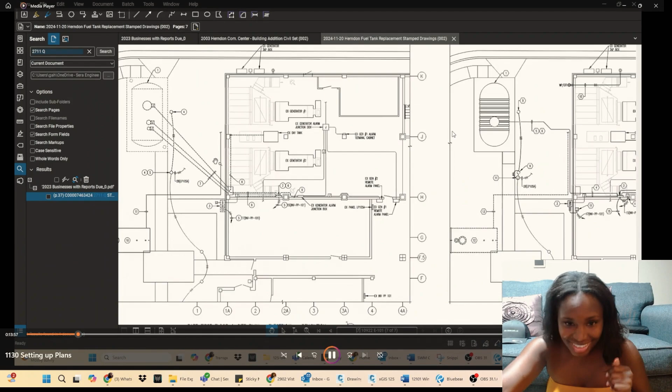I'm really looking at the plan, seeing how everything is laid out, and going through other emails to make sure I have everything I need downloaded, because I think I sent someone down before, but things happen.

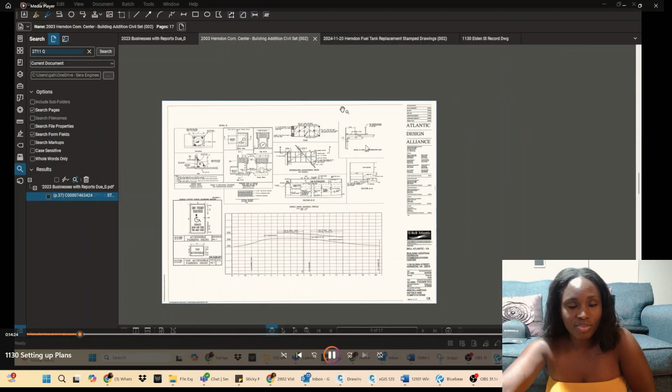Currently I have Victor working on putting the survey together. Victor was out, he was on vacation for a week. That's the issue of having a small team. We will grow, don't worry, we're interviewing.

Here I'm just trying to get this property line. What I'm going to do with it is bring it into the NRCS soil survey, so that I can extrapolate the soil information. That didn't work, so let's skip around, but you'll see how it didn't work.

Here I was looking at other example plans that I did receive, since I'm not 100% familiar working in the Town of Herndon. I have worked in neighboring cities, because Virginia is a commonwealth. As a result, Alexandria has their own thing, Arlington has their own thing, Fairfax County is their own thing, Herndon is their own thing. Falls Church is probably known as the most stringent as far as their submission process, they have their own thing.

So I asked for some example projects so that I could figure out how they want things laid out. That's the most important part when you're doing projects from jurisdiction to jurisdiction. The information is pretty much the same, it's really just laying it out how the reviewers want to see it. It's going to be different regardless because we're all different companies, so we're going to lay it out within our style, but overall it needs to contain the information they want to see.

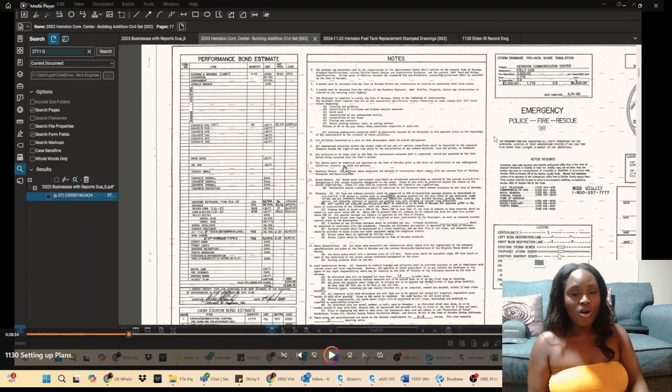I'm copying all the plans from the emails into the folders, seeing that this is a very recent plan that was approved. The reason they gave me this project is because in particular, they did not do any stormwater management facilities.

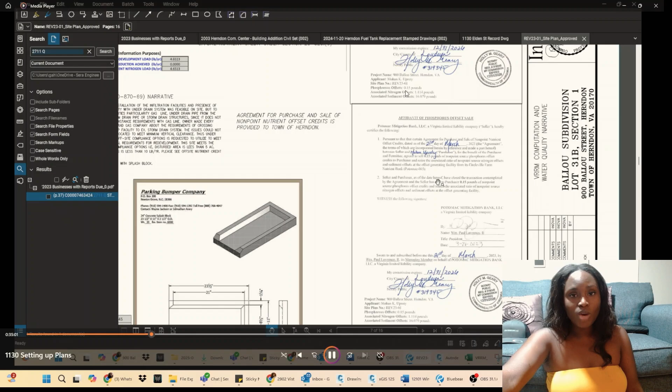So they bypassed doing any type of quantity control, or didn't have to, because their disturbance or increase of impervious area is less than 10%. They only had to do quality analysis, which is basically the removal of phosphorus, and they did not do that either. So they didn't do it.

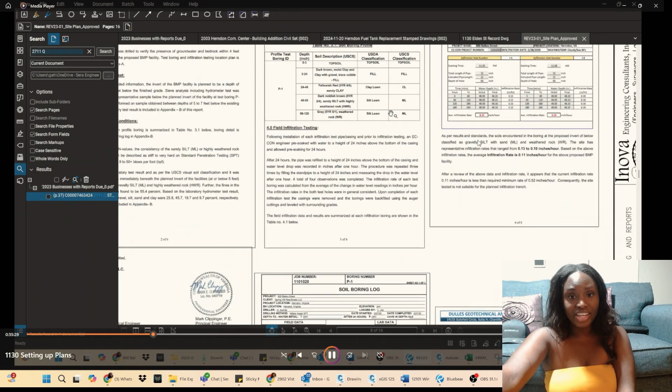Usually for that type of quality control analysis, you can do a facility as well, like permeable pavement or bioretention. They also bypassed doing that, and just paid a fee to a nutrient bank in Herndon. I don't know if it's for Herndon or Virginia, I need to double check that.

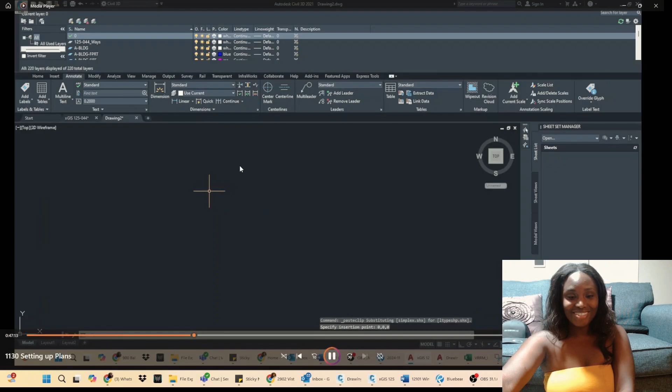Let's skip around. This is me going back to trying to copy this property line, putting it in a different place so that I can upload it into the NRCS soil survey. I spent entirely too much time trying to do this, and it kept failing. I don't know why it kept failing, I checked it in so many different places.

Victor, one of my surveyors back in town, is also trying to put some surveys on this list. This is me talking to a client in the middle of all this, about projects I should put on the list for surveys to go survey. They had 4 projects they wanted me to do a couple weeks ago, and now that our surveyor is back in town, I was calling to see if she still wanted to proceed with the surveys. She called back today, and I think she wants to move forward.

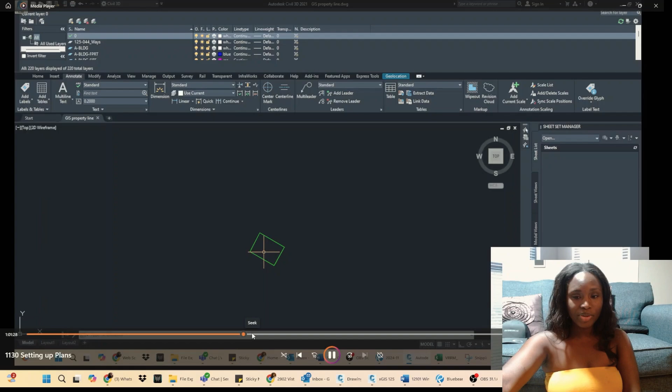There was a little bit of a tiff with her person, a surveyor she had previously. She had him call me, and I think there was some type of issue with him. We just clashed for some reason. So I was just making sure everything is good. She was letting me know she didn't know what happened, and she was on my side as well. So I think the relationship there is maintained.

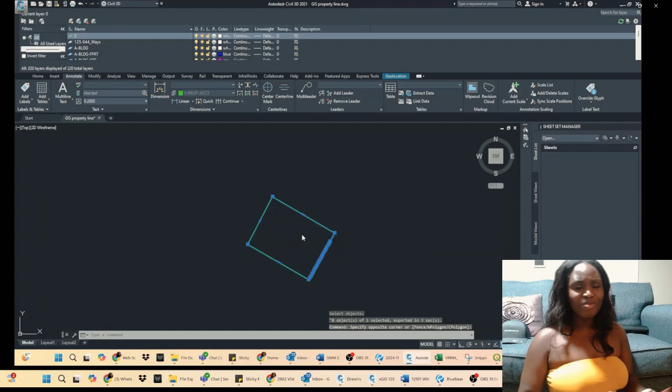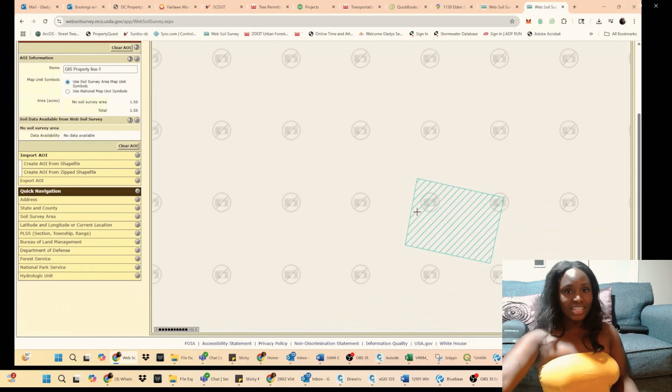Sorry, back to this project. Let's skip around. I'm trying to figure out why it's not imported in the correct location. You'll see here, I set it, and then it comes to this crazy location. I don't know why. It's in CAD, I have it set to NAD for North Virginia.

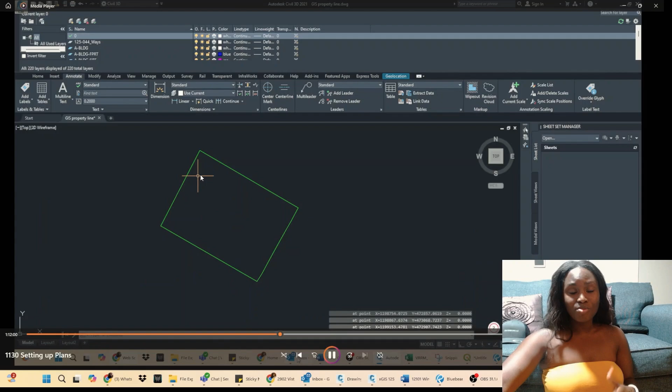So I don't know why it's coming to this location. When we pull this, it's also GIS information. We pulled this GIS information from the correct location. So I'll check again once Victor comes back with the survey, because he did survey it, but this is from the GIS, so maybe this isn't from the proper location. We'll see. Eventually I gave up, but I spent way too long doing that.

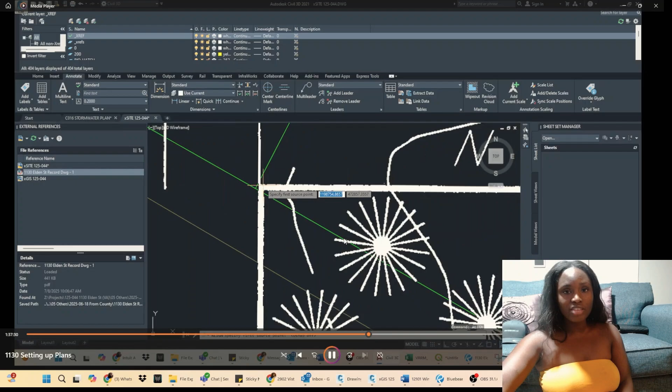Here I just brought in a previous project so I could build off of that. Here I'm aligning, because the survey isn't ready yet, but I still want to know where we stand as far as stormwater management, like if quantity control is going to be required for this project.

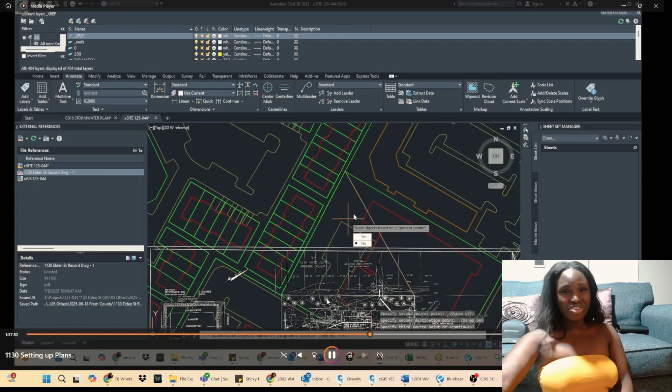I aligned the property lines with the image, but because this is a GIS property line, it wasn't accurate, so it's a little bit wonky on this side versus that side. Also, this is a survey from 2000, most likely hand drawn, so it's a little more difficult to align as a result.

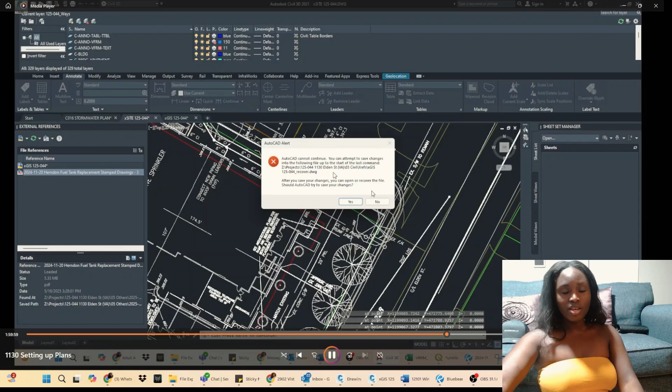Let's skip around. You'll notice the disturbance is only in this location. Here's what it is, here is the fuel tank. They even have a fence to allocate the limits of disturbance, which was about 3,000 square feet. It crashed, it's CAD, of course.

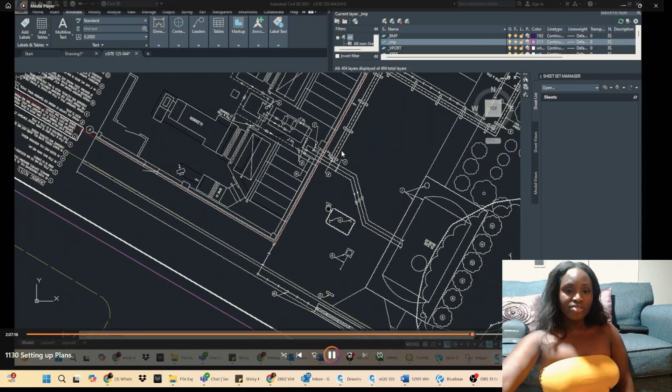Here I'm continuing to align the image with the GIS. I did end up asking the owner for their plans instead of just using their PDFs. He gave it to me today, but I want to wait until Victor is done with the survey until I proceed with finalizing the plan set itself. But this also gives us a good idea of what's going on.

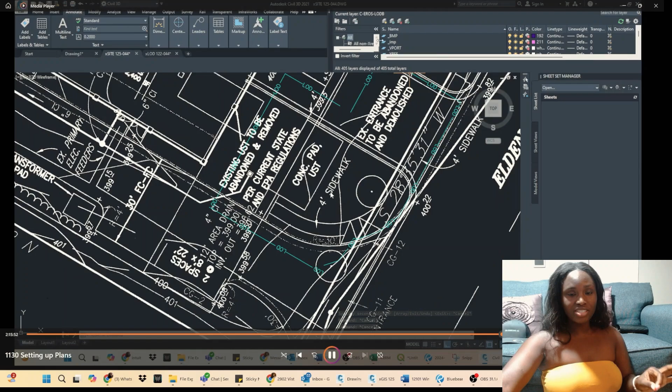So I used the image with the GIS to get the existing and proposed conditions. We need to compare that to see if we have an increase in impervious area by 10%. Here I'm comparing, there was a plan done for this particular project back in 2000, so I'm comparing that project and looking at the layout of the site to see what changes were made. It's a bit difficult to tell from it as well.

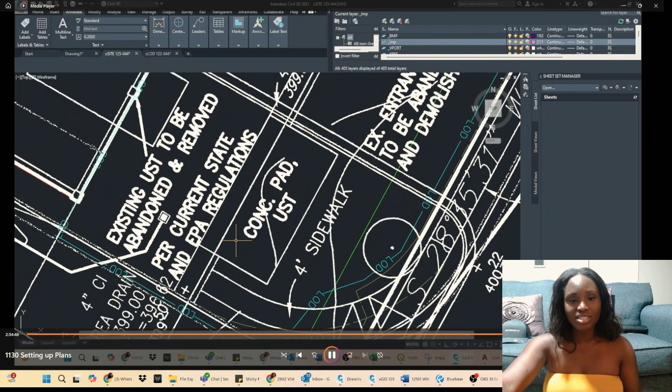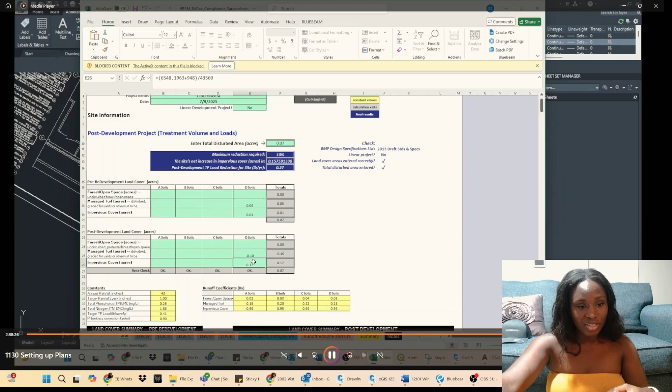So I'm entering the numbers into the spreadsheet. As you can see, net increase in impervious area is... so once I input those numbers, I have to delete these. I just used a previously used drainage table, and I'm also looking at the GIS.

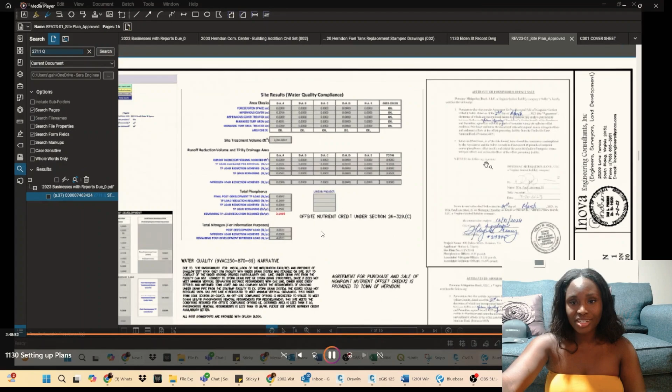I did end up putting my hours in for this project, that's why I went to QuickBooks. Because we're not doing a full quantity control for this project, I am going to charge it hourly, so that it would be a little more advantageous for a client, as opposed to us charging for the entire fee.

Here I'm just asking some questions of the reviewers, the inspectors, and the client to make sure we're all on the same page. For example, there is an affidavit that needs to be signed off on for the nutrient credit, but you still need to do the entire plan set. You just don't submit that one thing.

So we got through that and figured out some really good information for this project so we can move forward to the next steps. This project only needs quality control. The net increase in impervious area is less than 10%, which is a Virginia requirement. If you increase your impervious area by more than 10% in an area that's less than an acre, you need to do stormwater management. If it's less than 10%, you are exempt from quantity control. I hope I'm saying that right.